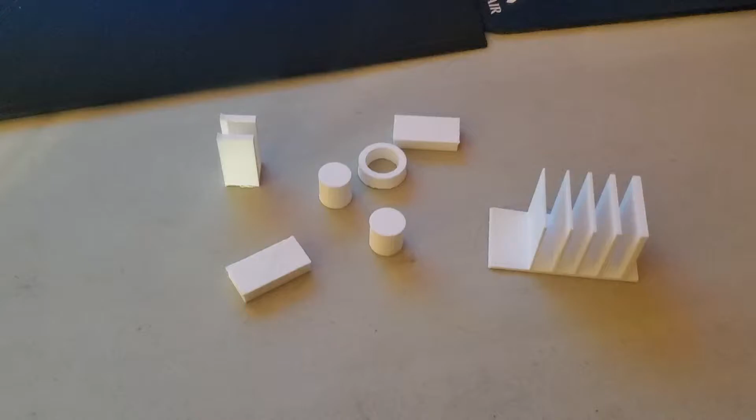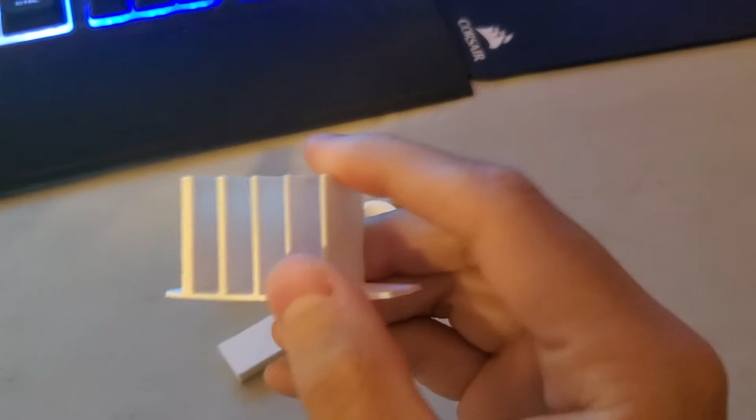Alright everybody, so before we even begin this video, this is the test parts I printed in the last video. This is the wall test. As you see, we have only on this one 5 walls, not 6. The printer could not print the last one. But we have run into some issues.

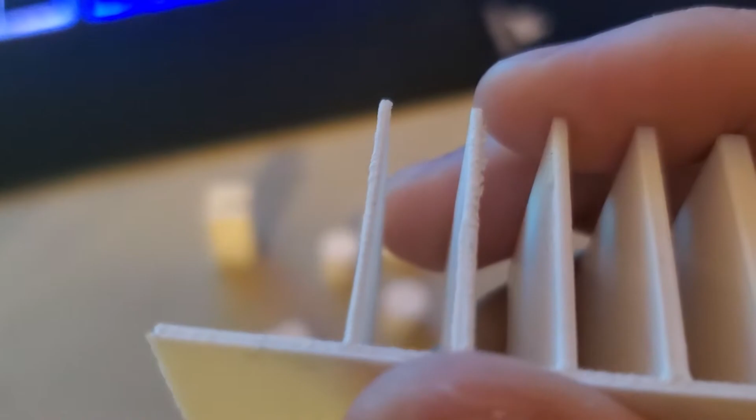As you can probably tell, there's like imperfections and weird. This is kind of bent here, deformed. And if you look straight on there, probably see this is angled. That's another imperfection that we're going to run into when printing. But these all work well. First two are a little flexible and they get more solid as time goes on.

And then we have these pieces here. This here is the slot. Another issue we run into is I laid this thing, I printed it like this, right? Hence the reason why on the bottom it's kind of like not flat. It's kind of like spreads out. I don't know how to fix that. I'll probably look into it.

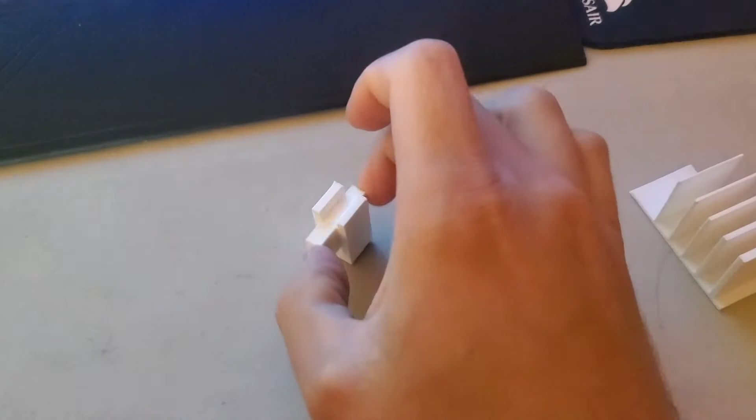So these pieces do fit. One is tighter than the other. This one I think is the looser one. I will actually go on SolidWorks after I'm done with this to just show you what their actual sizes are.

These are like, let me think here. So they're like 0.02 smaller than this, but 0.01 smaller than each other. One is smaller than the other. I think this one's a smaller one than this one.

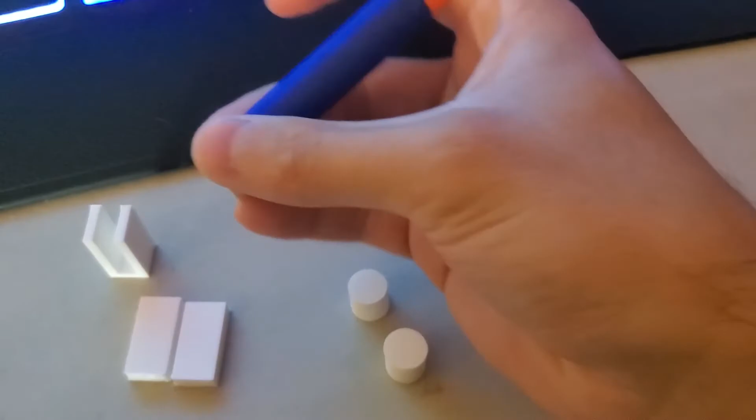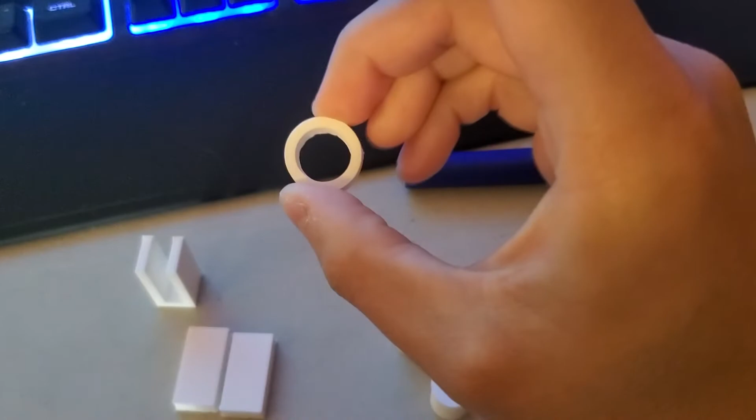And the next we have is the ring. I think it's a ½ inch in diameter. We can demonstrate the ½ inch diameter by actually taking out something that is also approximately ½ inch in diameter, the Nerf dart. And you'll see it kind of fits in there perfectly. Ish. This one has the same issue, it kind of spreads out on the bottom, so it's not completely smooth. Pins, same deal with these.

And I'm sorry about the camera; it's a little shaky because I'm recording this with my hand on my cell phone.

And yeah, so those all give me kind of a good idea what we're dealing with. This thing also was good just to check how small it can actually go. These, by the way, are printed on the highest quality, 50% infill. But I'll have to make some adjustments and stuff. This also was a good time to try to figure out different printing tactics.

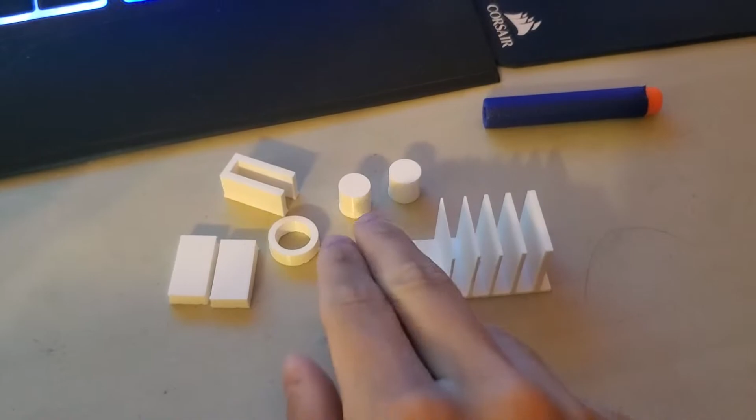When you're gonna print all these things, I did find that what I should probably do, what a lot of people probably should do, is print them in ascending order of size, so the print head doesn't print over here and then have to go back to print over here. It was kind of set up like this, so it had to print here and then go back here and print here, and it takes about a second to go do that.

But I think these tests were a success. A good way for me to figure out how much we need to adjust, and we're going to do those adjustments right now. So when we get to SolidWorks, we'll check back in.

Alright everybody, today we're going to be continuing our pulley. Not like last episode where I just created these little parts. Today we're actually going to be doing the adjustments. To start, we need to go to the actual pulley assembly. I'm going to go do that right now.

And I actually want to check some of that's print 3D. That's not it. Where is it? Not there either. Yeah, I was testing Lego parts. Pulley 2. Yeah, pulley 2. I'm actually going to take the pulley assembly. I want the full assembly, just the assembly right now, and I want to check some stuff. Yeah, it's fine to rebuild it. We'll save it too.

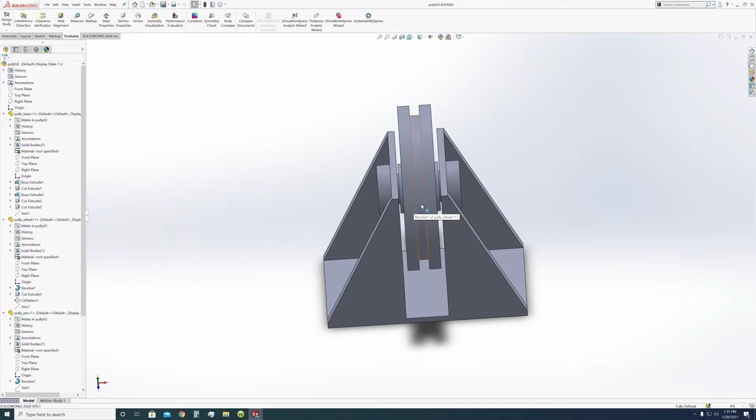The easiest one would be the size of this hole and the clearances between the big pin and the actual wheel itself. So that's going to be the easy part. Then we need to figure out how to friction fit. I kind of figured out how to do that.

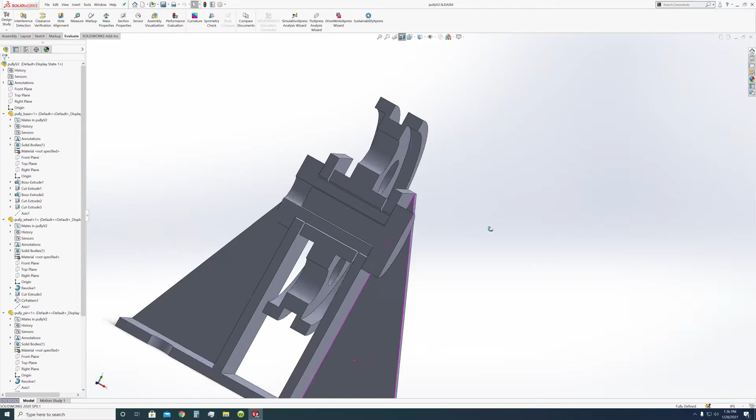I'm guessing all I have to do is go a tad bit bigger, because both pins that I printed do not fit in. They're not tight enough, and we'll have to look into that. I think I know a good number though. Instead of going 0.48 to fit into a hole that is 0.5, I think we go 0.49 or 0.485.

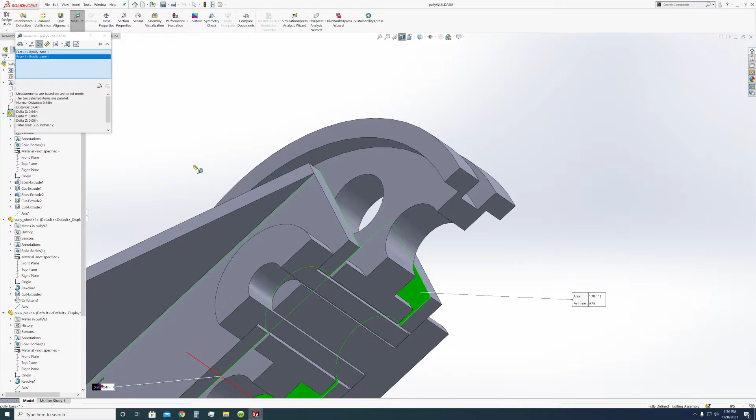And then for here, the wheel here, I think we're good. I'll have to check into that too. Actually, we'll just expand this. Probably not, actually. Let's go check. The distance between these two walls is 0.64, and then the actual pulley wheel, I think, is just straight up 6, right?

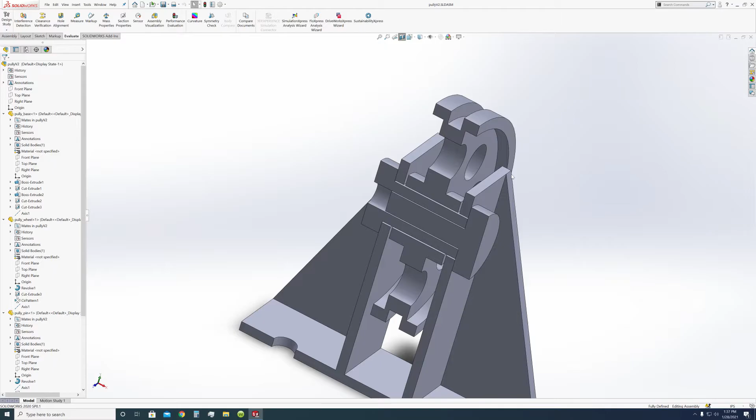Keep clicking that. Go to a wall. Click the face there. That face and that face. Yeah, it's just straight 6. That's good enough. According to my slot test, we achieved that. Slot test did fine, and it's a lot smaller than that. 0.02 was what the slot test was, and the pieces just slide in and out, no problem.

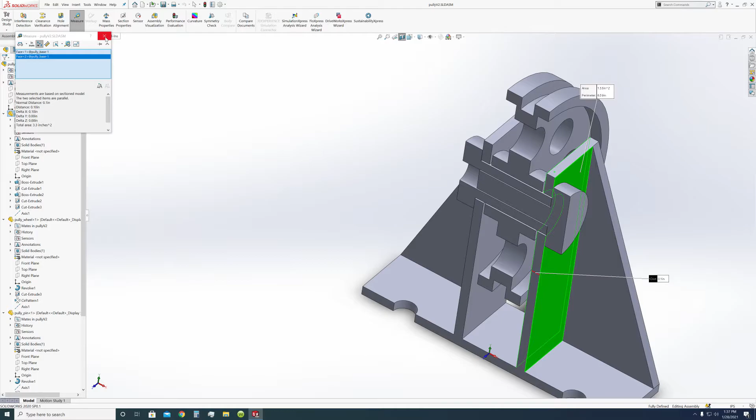Wall thickness, we already did the wall test, and notice that these are 0.1. 0.1 works wonders. It's a perfectly fine size. I did find that 0.1 on the wall test was the final size. I think it's a good size. We'll stick with the 0.1 wall size. This thing will definitely be a little bit easier to make.

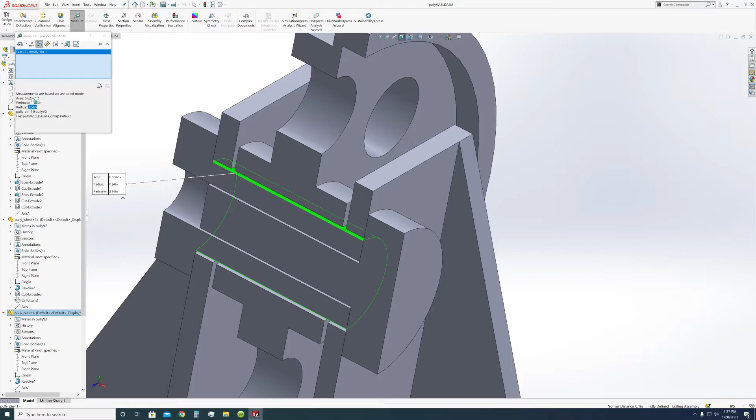The diameter of said pulley. Now, I'm actually going to go a little bit more on the small side. So this is the radius, actually, they would call it. I think it's that 0.24, and this should be like 3, right? 0.25. We are actually going to have to go a lot smaller than that. For sake of simplicity, I'm probably going to shrink the pin here. I'll just shrink that down.

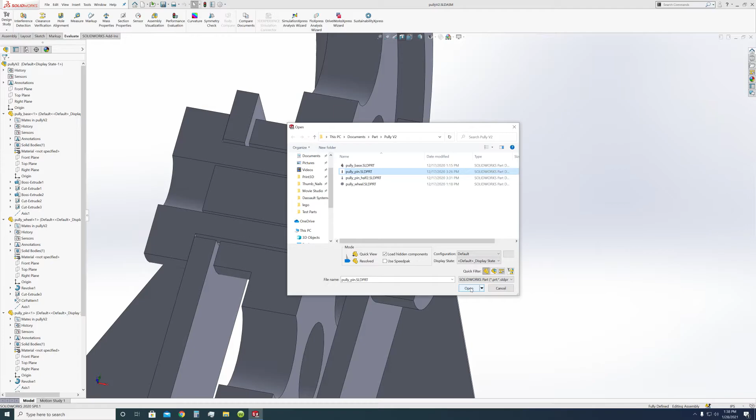We'll just open that up right now, and we should go pulley pin. Yeah, pulley pin. This is technically the first half. And we go here, revolve. And I'm actually going to change that number. I don't even know which number it would be. It should be that one. Yeah, that's the actual pin size.

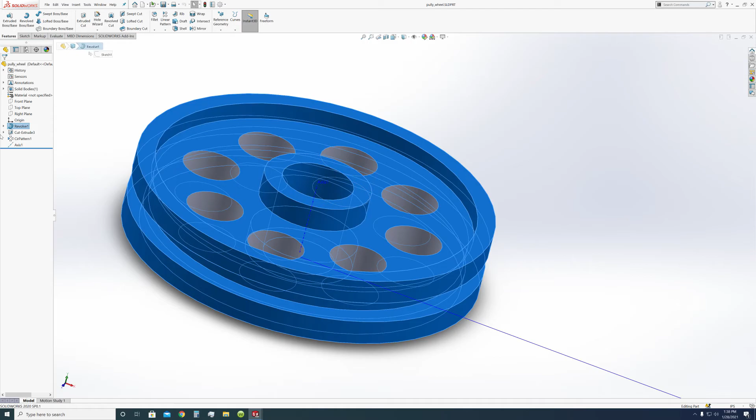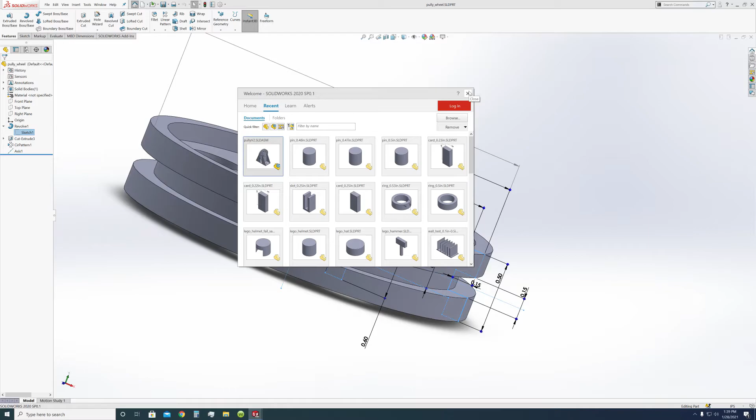Now we're going to go back to open, recent files. We did, and it doesn't fare well in my opinion. It fits. It's loose. But I feel like we should go more to take into account imperfections. It feels fine though. We'll have to finish them, take a rotary tool to them and probably sand them down a little bit. But actually, you know what? It's fine. 0.03 smaller is fine diameter.

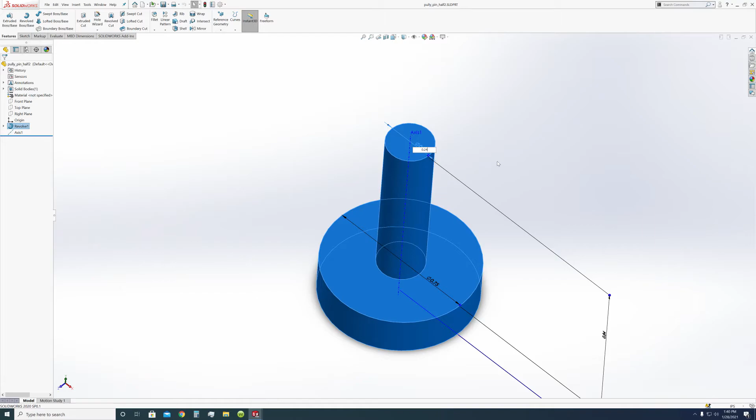Now the inner diameter of this is, we did an extrude cut, which is a little odd, but 0.25. Now, if we look at our pin half 2, we'll notice that it's 0.2 under. That, to me, might be too big or too small. In my opinion, I think we should go 0.24. It's a little risky, but it might work.

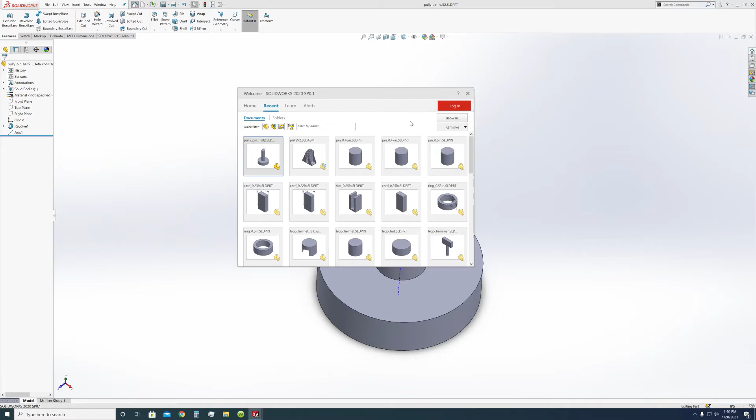If we go back to our recent documents, you can see that we did a 0.48. Now 0.48, the pin fits perfectly in there, but it's not tight at all. Not any form of tightness. I just go 0.01 under the size, and I just rebuild and save it.

Go back to our pulley, rebuild it, and then go back to isometric view. So that's basically what this is going to be, pretty much. Quickly just go over that.

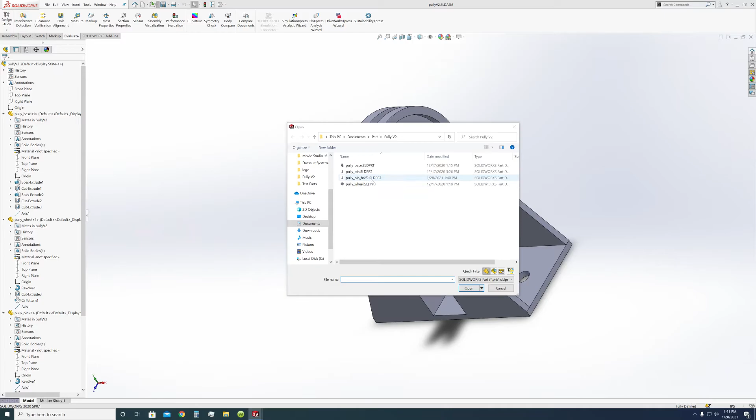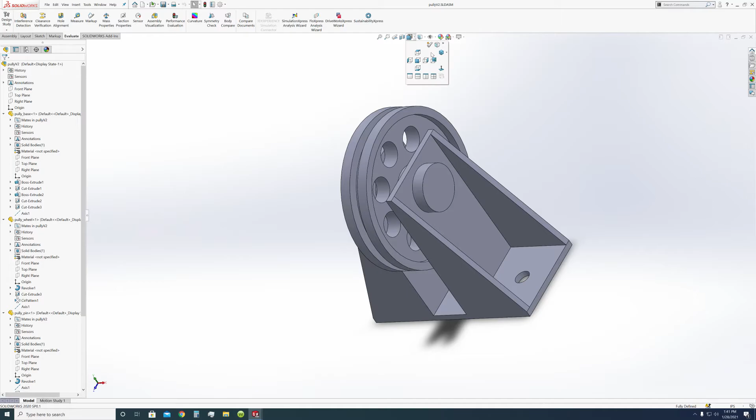Another issue is probably the actual frame. We'll check the frame right now. I wonder how big those holes were for the base frame. Base frame's holes, which is an extrude cut, are the right size. Okay, so they're about the same size as the actual pulley wheel, which is perfectly fine. It can rotate around those too. Get this back to isometric view. That should be it, actually.

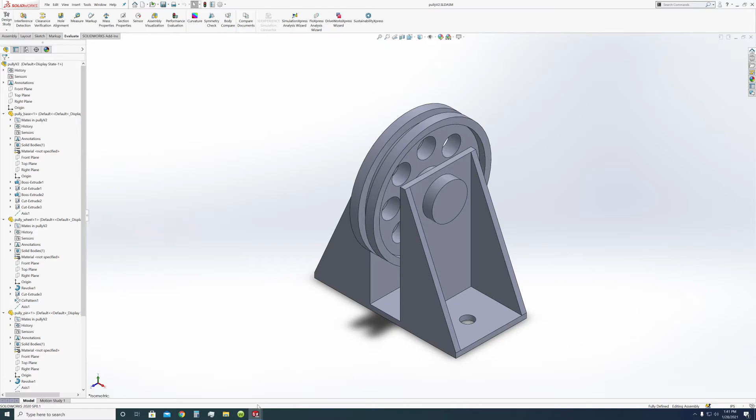All the bits and pieces here and there, and we can probably just go over how I at least print all the bits out. Now in here you can't actually, I don't think you can. You can print it as a whole file, which is a little dangerous. I've never tried to print this as a whole file. I wonder if I could. I might do an experiment on that in a future video, to see how a complete file, instead of multiple pieces, would work.

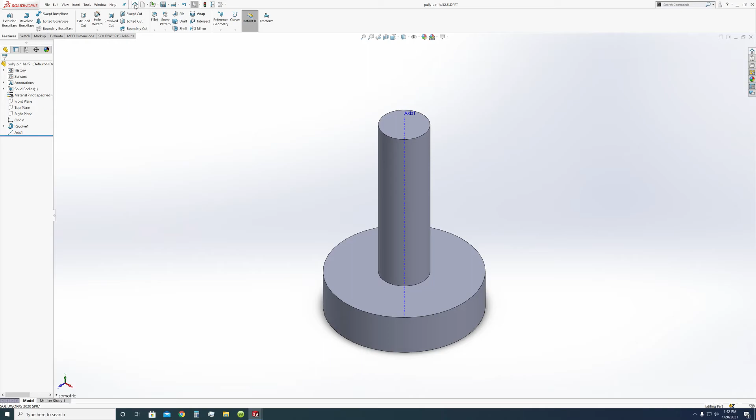So we saved the file. Actually not right now. Cancel. I'm actually gonna have to do this one at a time, don't I? Yeah, we're done with you. No, we have to exit first. Yeah, so we're done with this one here. We're all ready. So for SolidWorks, you go up to File, go to Print 3D. You ignore all this and just go straight to Save to File.

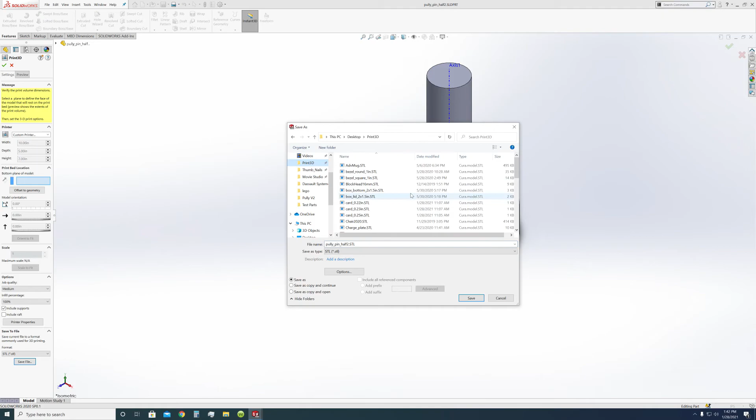Not all printers, I think, can use this, but they will normally use an STL file right here, which I can save to my Print 3D folder, which is just a single folder I use. I'm actually going to put these into a new folder called Pulley 2, save the pin there, pin gets saved, and move on to the next piece, the base.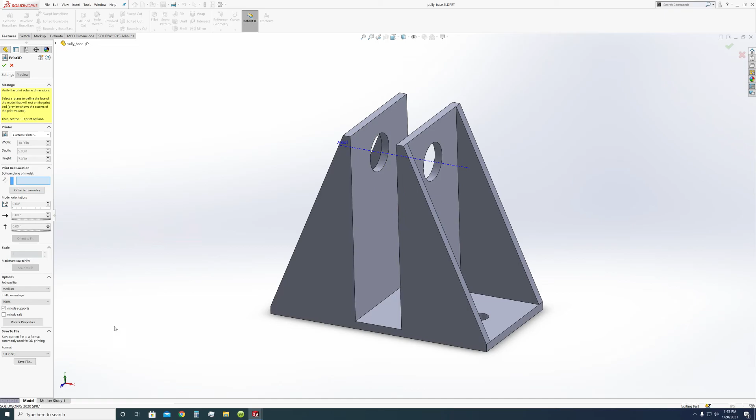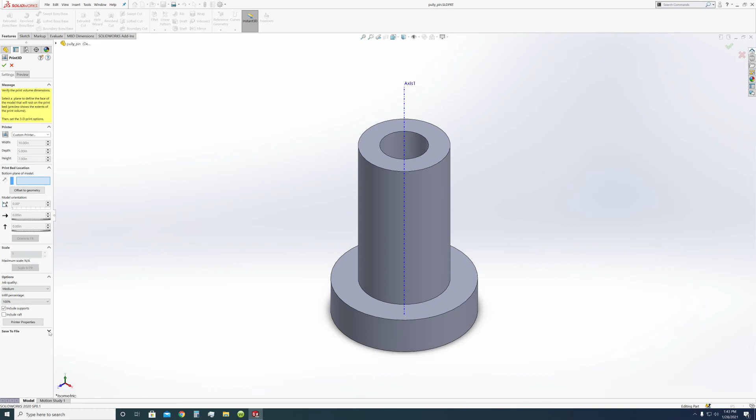The base is probably going to be the longest to print, just because I'm not printing it flat, I'm printing it straight up like this, and hopefully it will not fail, it would be kind of sad if it did. Just put the pulley base there. I've done a lot of tests, and I'm pretty sure we're ready to print all this stuff. The first pulley, I might be able to show a video on it at some point, but it's a mess, and I don't really want to mess with it. So I just start from scratch, as I've said before.

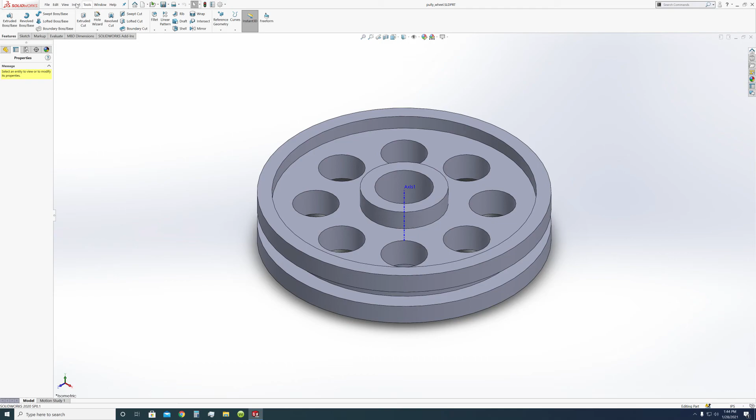Moving on. Now we just gotta get the wheel. It's not Print 3D. We actually have to go to our cheat, go through another file on that thing. I'm gonna pin it. Now I don't want to pin this. I actually want to pin the part file, but I guess I'm not gonna be able to do that. So we move on to File, move over to Print 3D, go back up here to Print 3D on the pulley wheel and save it.

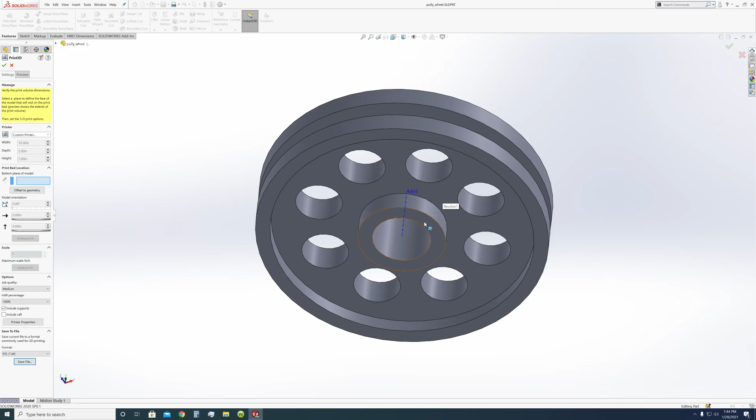This will be one of the more complicated ones, because it's not only going to have to print some form of raft, but I have to print support here, and I'm actually going to extend it. This is not going to lay flat on the print platform. I'm going to put a raft or support there by lifting it just slightly above where it's supposed to go, and then leave it at that, and then we can finish that up.

So I will have it all printed probably next video, where I will print it all out, maybe have some footage of the process, might do a little bit of a montage. I'll have to learn how to do montages. So that will be the end of the pulley project. Once it's all built, we'll have a print montage, then an assembly, and then maybe a comparison to the failed pulley. I actually have most of the pieces, so we'll deal with that.